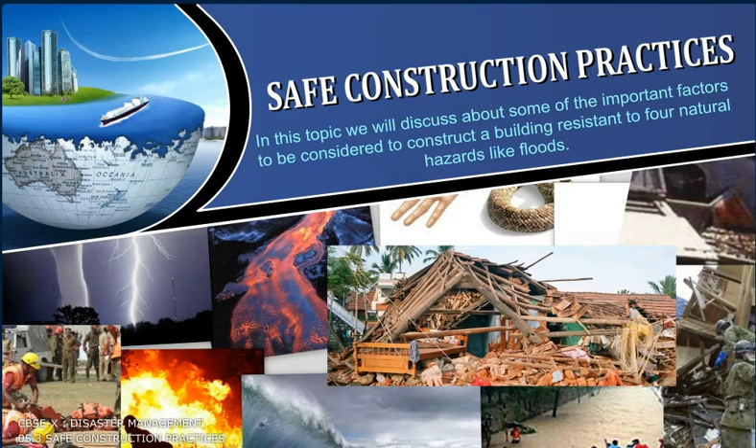...safe construction practices. In this topic, we will discuss some of the important factors to be considered to construct a building resistant to natural hazards like floods.

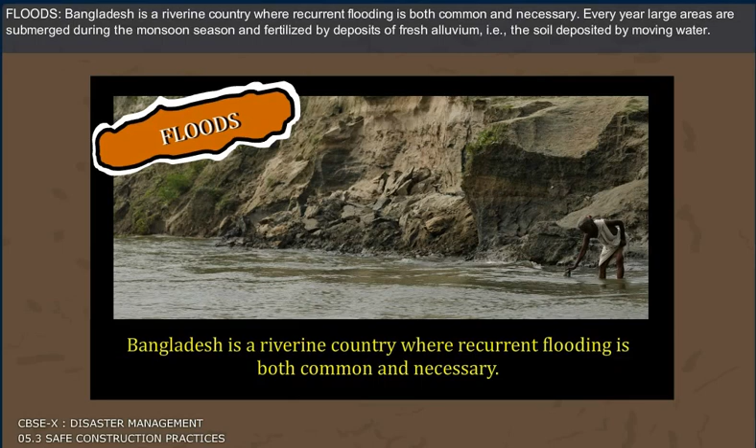Floods. Bangladesh is a riverine country where recurrent flooding is both common and necessary. Every year, large areas are submerged during the monsoon season and fertilized by deposits of fresh alluvium, that is, the soil deposited by moving water. If the waters remain stagnant for too long, these beneficial floods become major disasters.

Such was the case in the summer and fall of 1974 when flooding extended over nearly one half of the country and stagnated for more than a month. At least 1,200 people died in the floods and another 27,500 died from subsequent disease and starvation.

Approximately 4,25,000 houses were destroyed and severely damaged. A total of 36 million people suffered severe hardship and losses due to the disaster. Water is a source for all life forms. Without water, no life is sustainable.

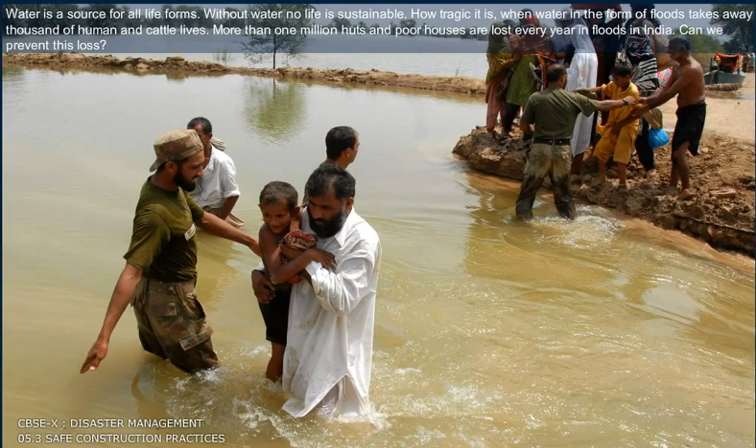How tragic it is when water in the form of floods takes away thousands of human and cattle lives. More than 1 million huts and poor houses are lost every year in floods in India. Can we prevent this loss?

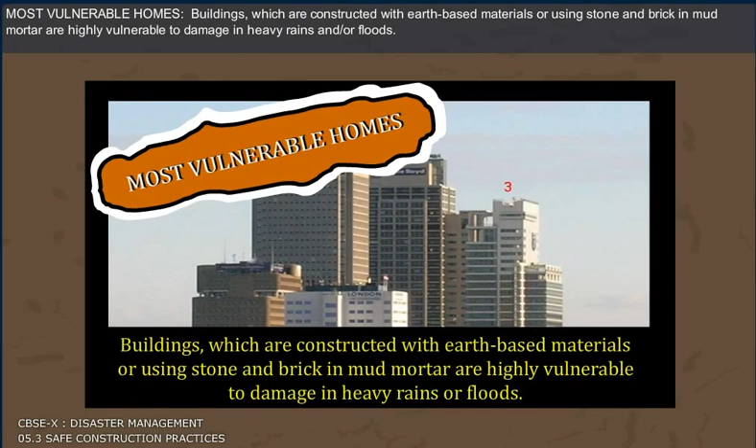Most vulnerable homes. Buildings which are constructed with earth-based materials or using stone and brick in mud mortar are highly vulnerable to damage in heavy rains and/or floods. The huts made from biomass materials like bamboo, leaves, thatch or light construction using metal sheets are easily destroyed in floods and washed away.

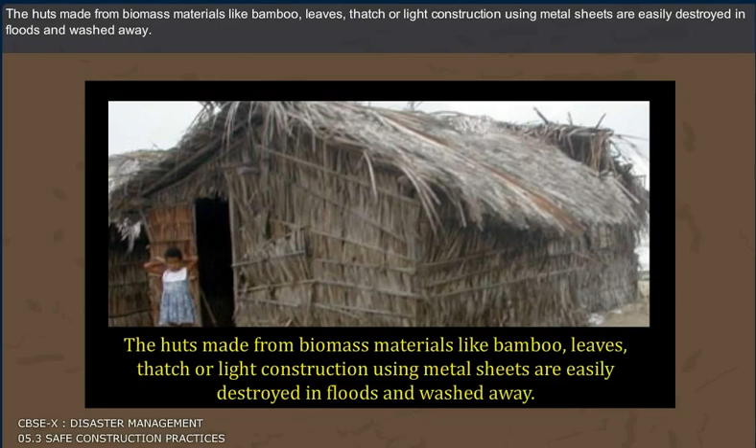The occupation of areas within the floodplain of rivers has increased the vulnerability, especially in areas of high population concentration. Floodplains attract poor people because of inexpensive land values.

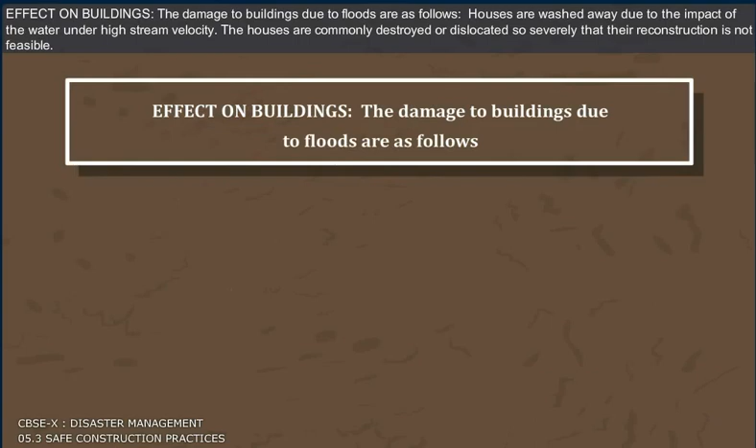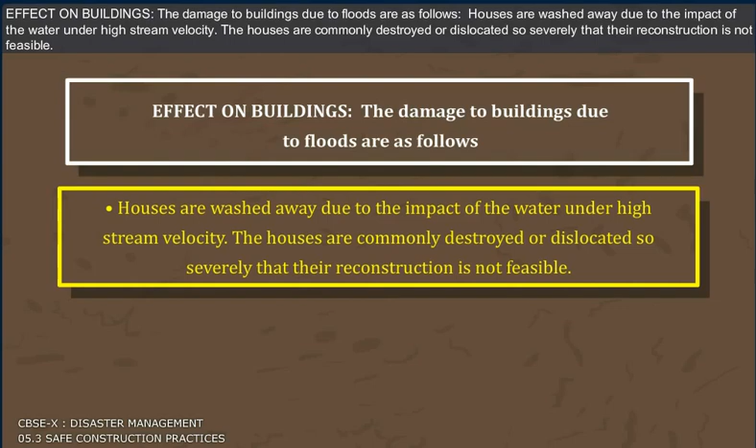Effect on buildings. The damage to buildings due to floods is as follows. Houses are washed away due to the impact of the water under high stream velocity. The houses are commonly destroyed or dislocated so severely that reconstruction is not feasible. Houses constructed out of lightweight materials like wood float when they are not anchored properly.

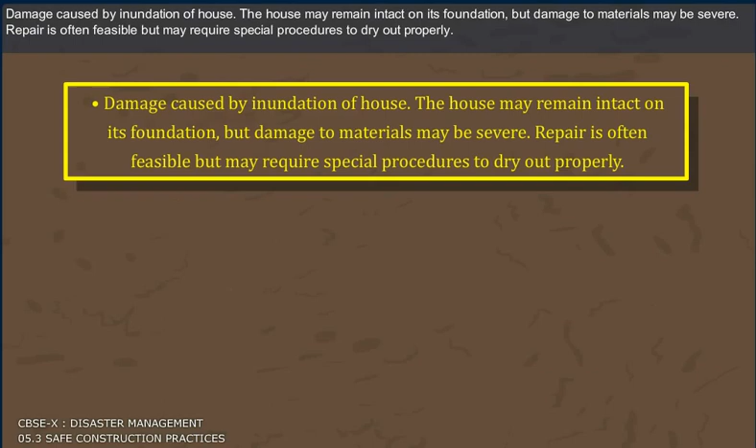Damage caused by inundation of house. The house may remain intact on its foundation, but damage to materials may be severe. Repair is often feasible, but may require special procedures to dry out properly.

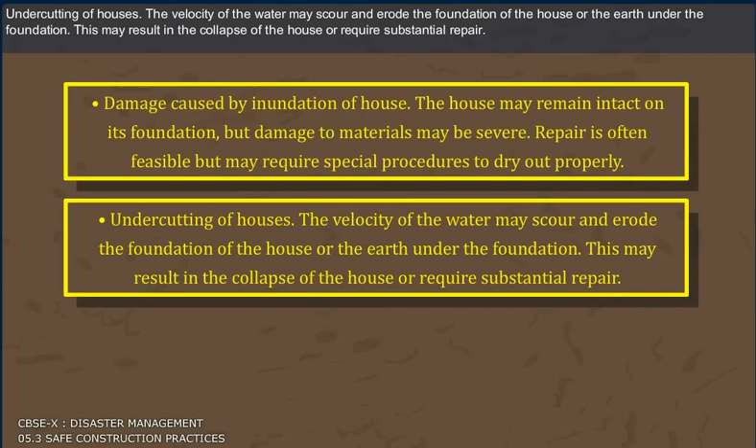Undercutting of houses. The velocity of the water may scour and erode the foundation of the house or the earth under the foundation. This may result in collapse of the house or require substantial repair. Damage caused by debris. Massive floating objects like trees, electric poles, etc. may damage the standing houses.

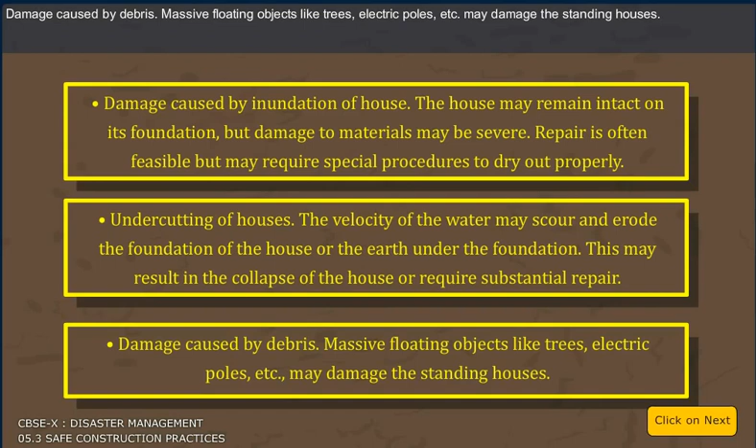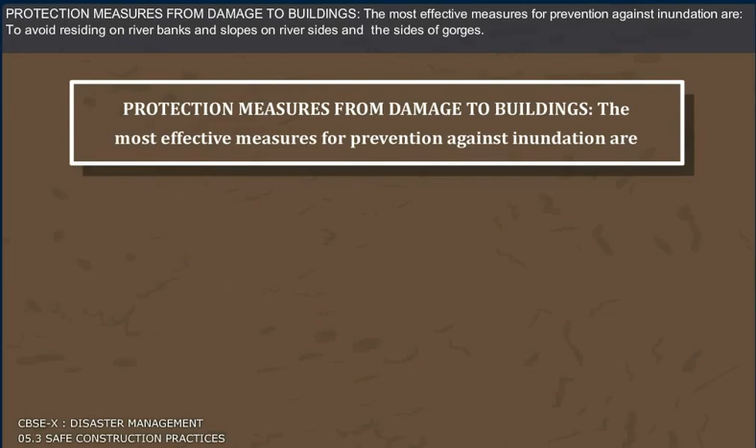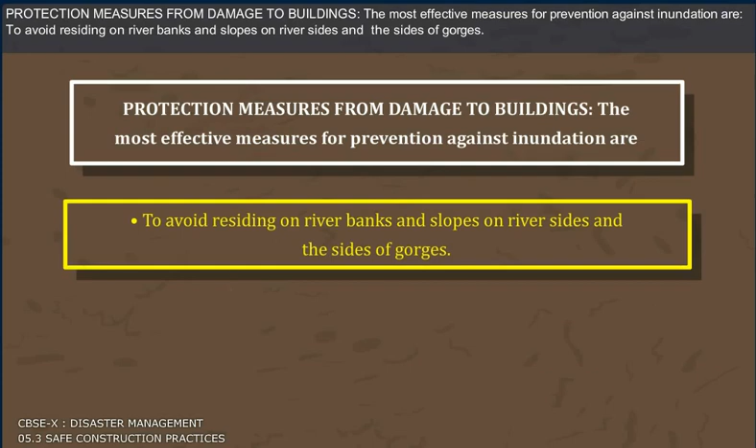Protection measures from damage to buildings. The most effective measures for prevention against inundation are to avoid residing on riverbanks and slopes on riversides and the sides of gorges. To build at least 250 meters away from the sea coast or river banks.

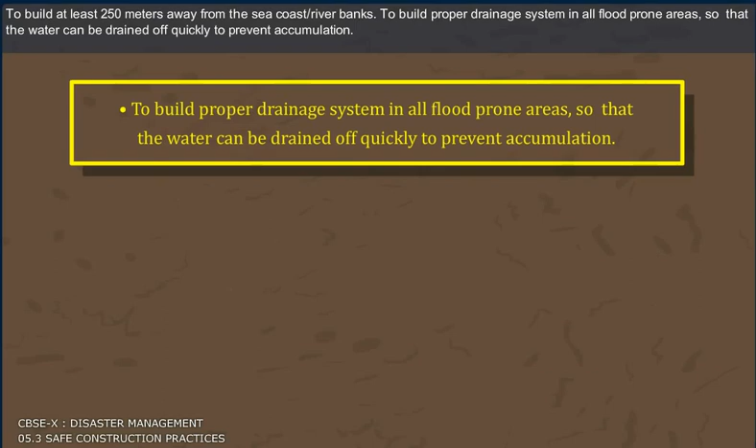To build a proper drainage system in all flood-prone areas so that the water can be drained off quickly to prevent accumulation. To construct the building with a plinth level higher than the known high flood level. To construct the whole village or settlement on a raised platform higher than the high flood level.

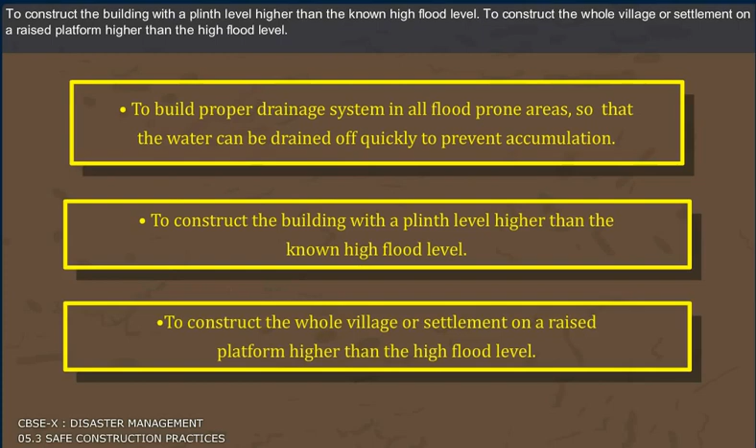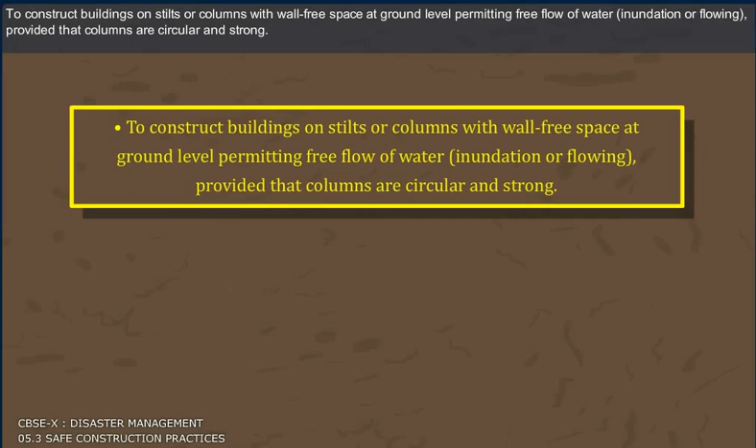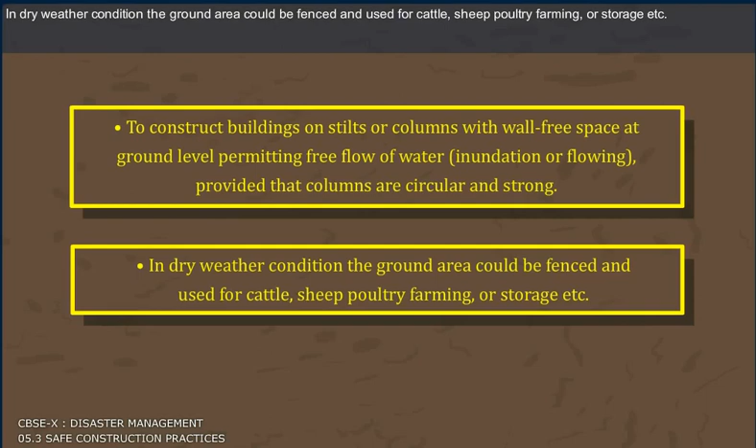To construct buildings on stilts or columns with wall-free space at ground level, permitting free flow of water, inundation or flowing, provided that columns are circular and strong. In dry weather conditions, the ground area could be fenced and used for cattle, sheep, poultry farming or storage, etc.

There is an urgent need to mitigate the flood hazard by proper habitat management, watershed management, and incorporating flood-resistant features in our buildings.

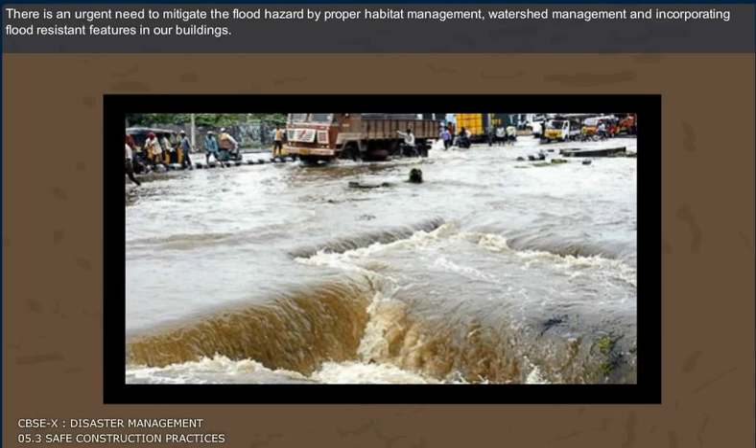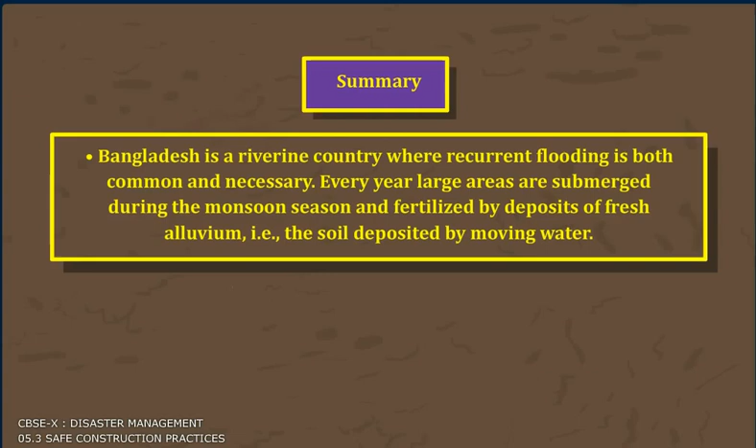Summary: Bangladesh is a riverine country where recurrent flooding is both common and necessary. Every year, large areas are submerged during the monsoon season and fertilized by deposits of fresh alluvium, that is, the soil deposited by moving water. Houses are washed away due to the impact of the water under high stream velocity. The houses are commonly destroyed or dislocated so severely that reconstruction is not feasible.

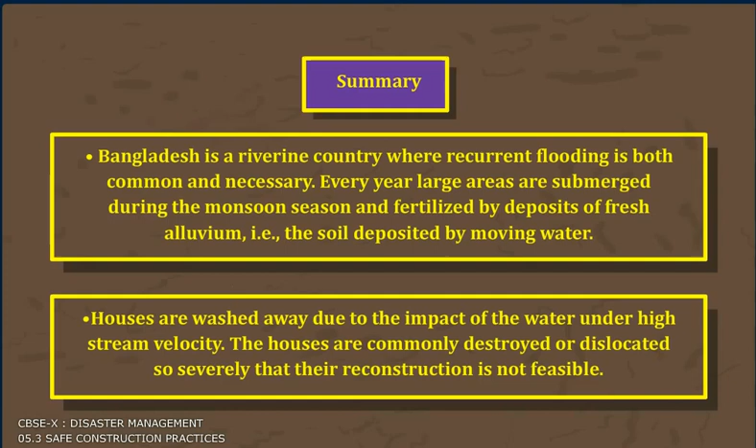There is an urgent need to mitigate the flood hazard by proper habitat management, watershed management, and incorporating flood-resistant features in our buildings. That is all in this topic. Always be an alert citizen and take quick actions to rescue yourself from flood situations.